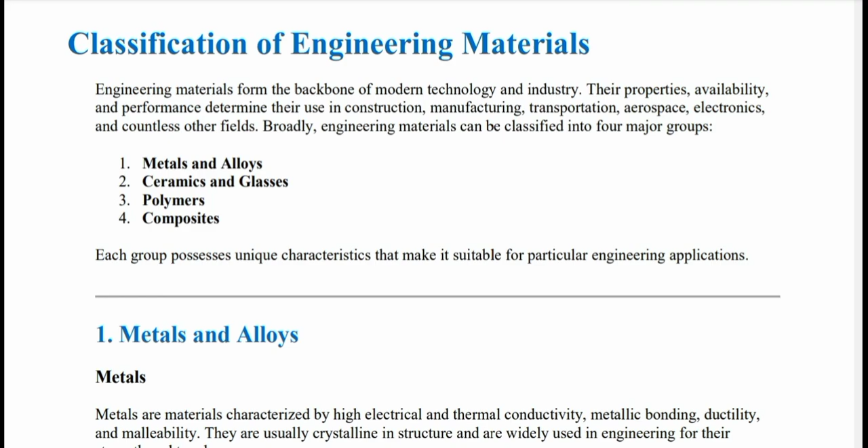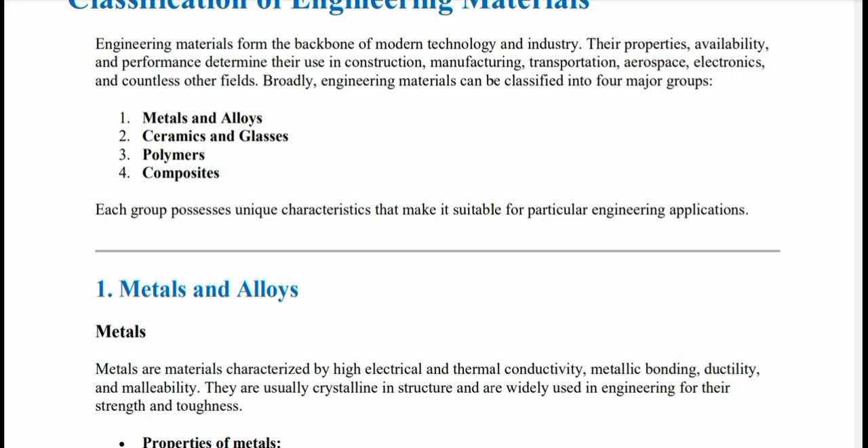Broadly, engineering materials can be classified into four major groups. First is metals and alloys. Second is ceramics and glasses. Third is polymers. And fourth is composites. Each group possesses unique characteristics that make it suitable for particular engineering applications.

So first is metals and alloys. Metals are materials characterized by high electrical and thermal conductivity, metallic bonding, ductility, and malleability. They are usually crystalline in structure and widely used in engineering for their strength and toughness.

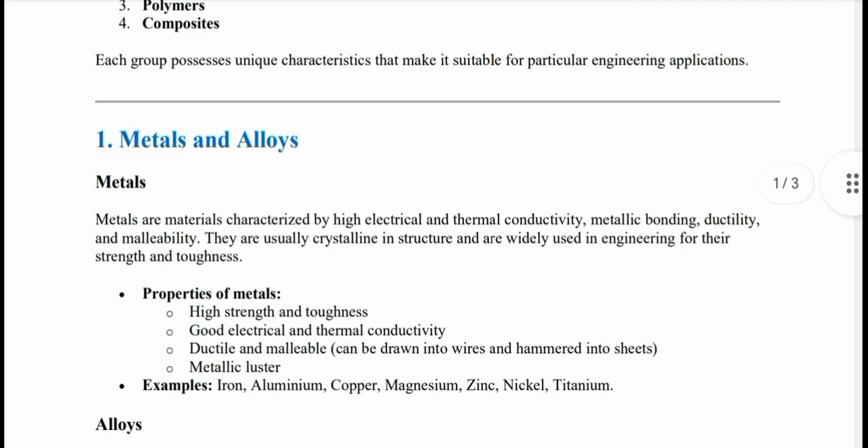Properties of metals: high strength and toughness, good electrical and thermal conductivity, ductile and malleable, that is, can be drawn into wires and hammered into sheets. Then metallic luster. Some examples are iron, aluminium, copper, magnesium, zinc, nickel, and titanium.

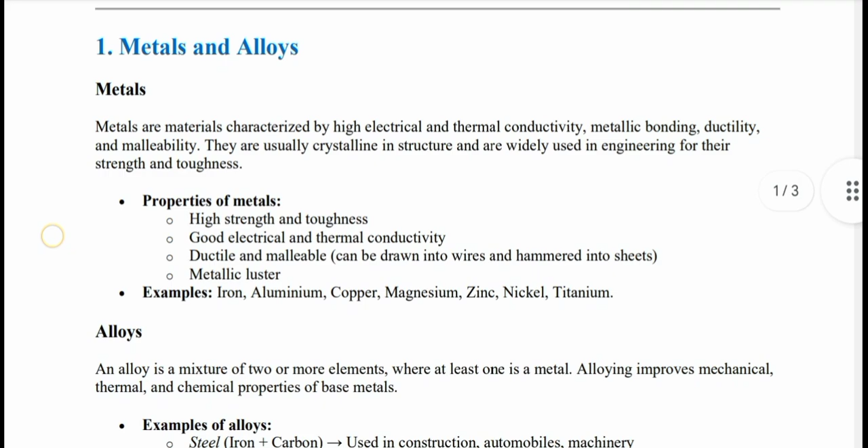Then alloy. Alloy is a mixture of two or more elements where at least one is a metal. Alloying improves mechanical, thermal, and chemical properties of metals. Some examples: steel is the alloy of iron and carbon used in construction, automobiles, and machinery.

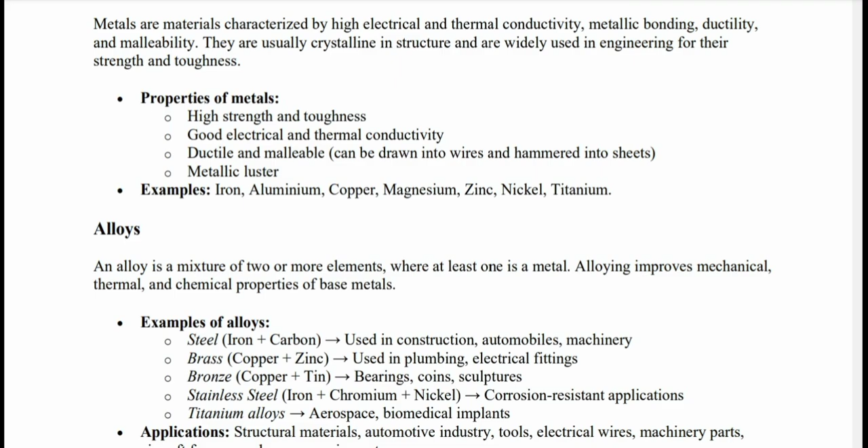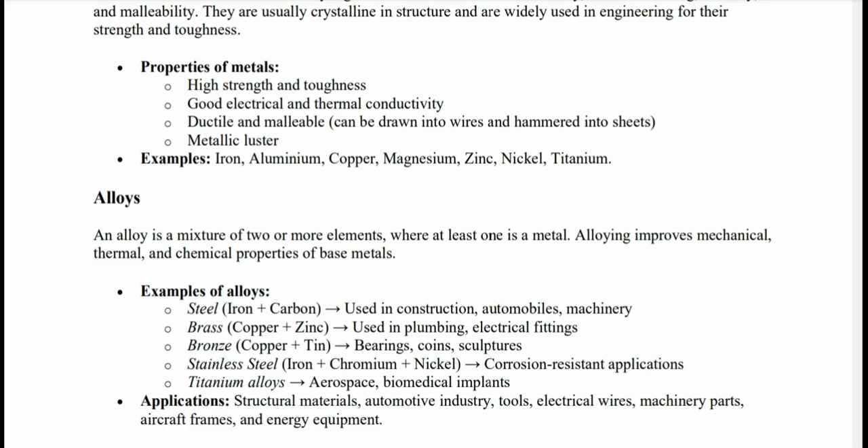Then copper and zinc form brass, used in plumbing and electrical fittings. Copper and tin form bronze, used in bearings, coins, sculptures. Iron, chromium and nickel form stainless steels, used in corrosion resistant applications. Then titanium alloys, for aerospace and biomedical implants.

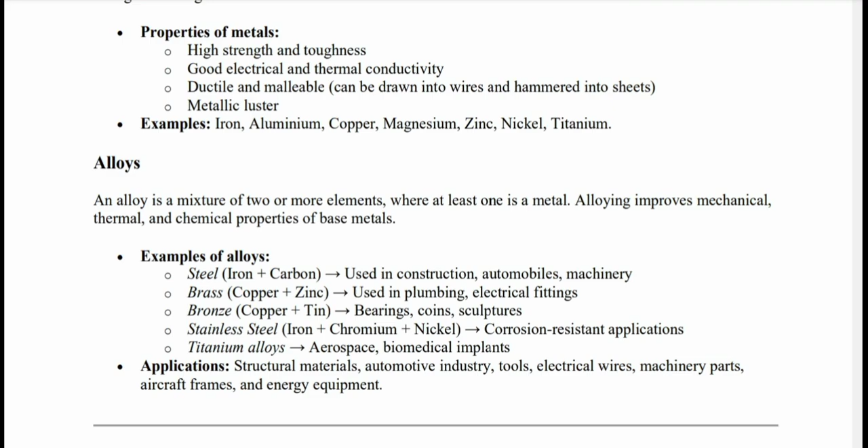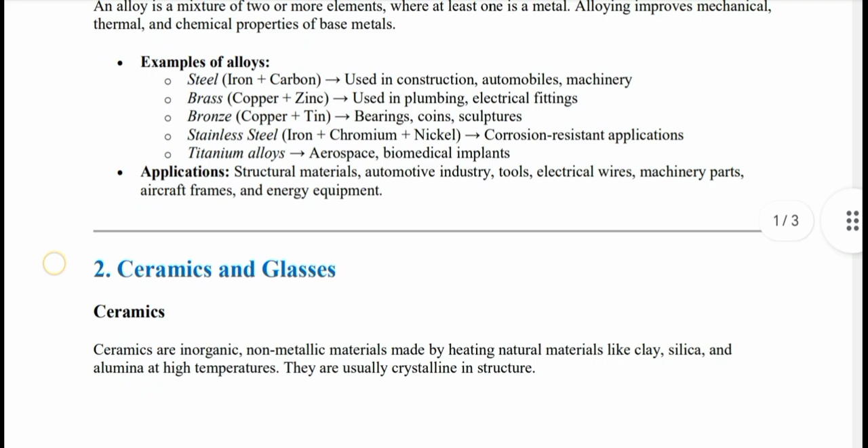Applications: structural materials, automotive industry, tools, electrical wires, machinery parts, aircraft frames, and energy equipment. Now, second type is ceramics and glasses. Ceramics are inorganic, non-metallic materials made by heating natural materials like clay, silica, and alumina at high temperatures. They are usually crystalline in structure.

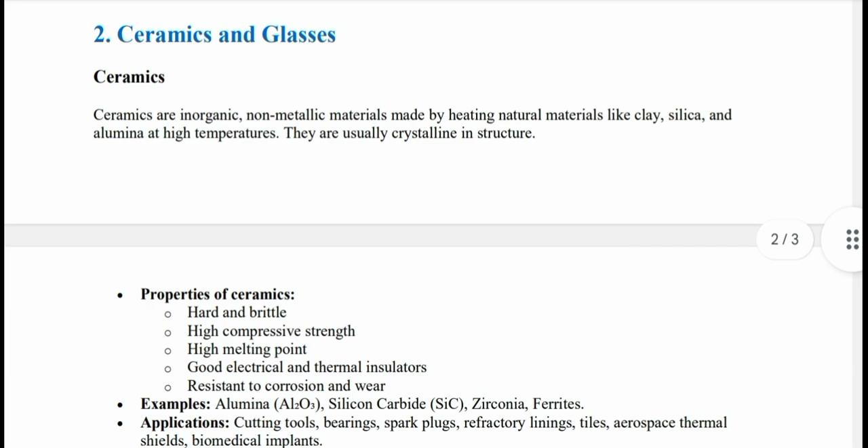Properties of ceramics: hard and brittle, high compressive strength, high melting point, good electrical and thermal insulators, resistant to corrosion and wear. Some examples are alumina, silicon carbide, zirconia, and ferrites. Applications: cutting tools, bearings, spark plugs, refractory linings, tiles, aerospace thermal shields, biomedical implants.

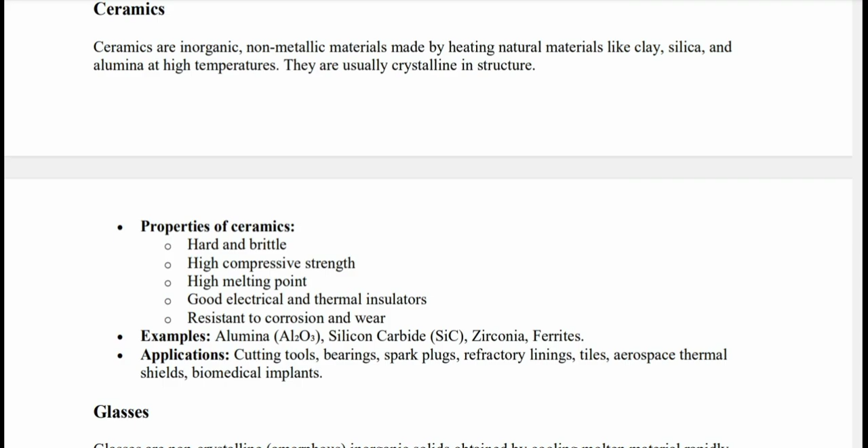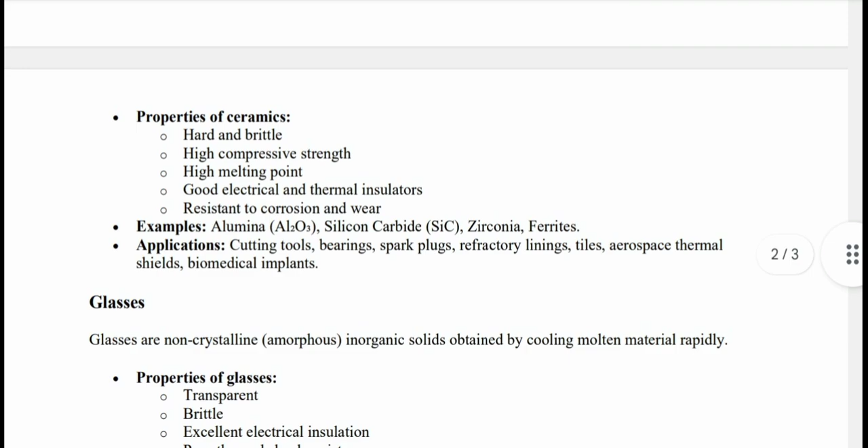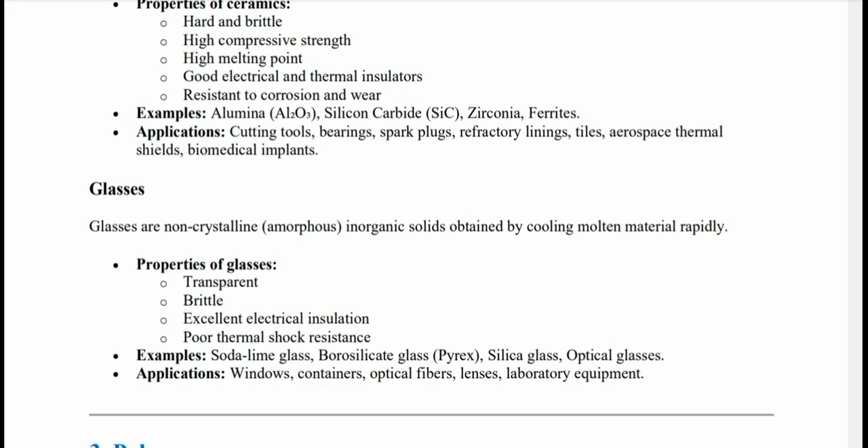Then glasses. Glasses are non-crystalline, that is amorphous, inorganic solids obtained by cooling molten materials rapidly. Properties of glasses: transparent, brittle, excellent electrical insulation, poor thermal shock resistance. Some examples are soda lime glass, borosilicate glass, silica glass, optical glasses. Applications: windows, containers, optical fibers, lenses, laboratory equipment.

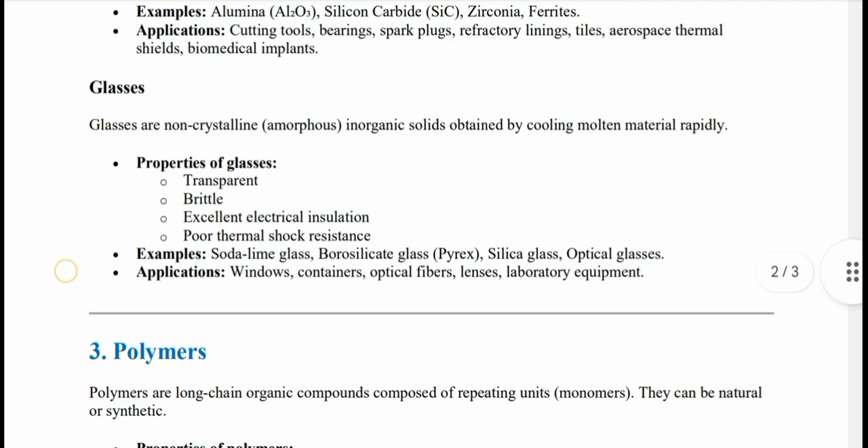Third type is polymers. Polymers are long chain organic compounds composed of repeating units, that is monomers. They can be natural or synthetic. Properties of polymers: lightweight and low density, corrosion resistance, electrically insulating, can be flexible or rigid, low strength compared to

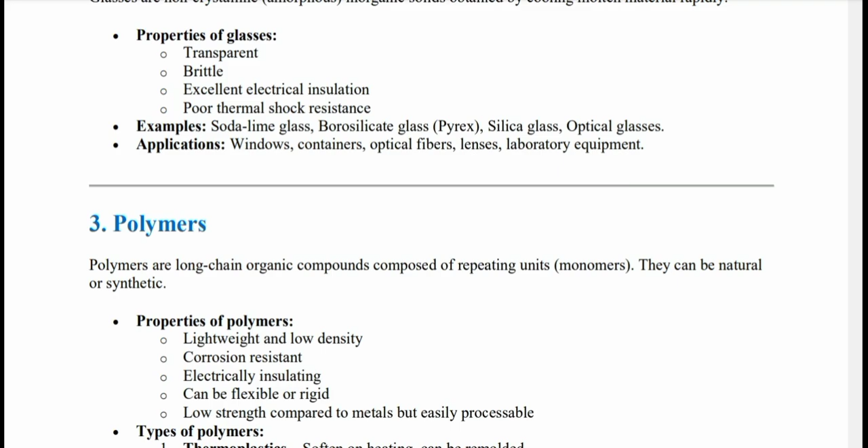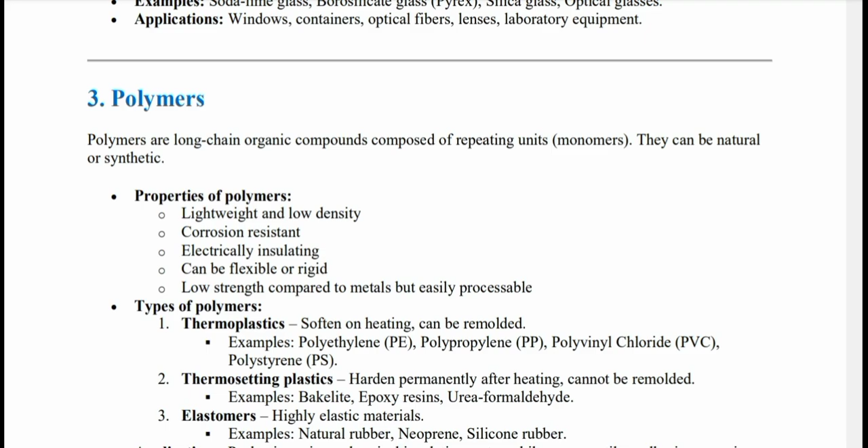metals but easily processable. Types of polymers: thermoplastic polymers soften on heating and can be remolded. Examples: polyethylene, polypropylene, polyvinyl chloride, polystyrene. The second is thermosetting plastics, which harden permanently after heating and cannot be remolded. Examples: bakelite, epoxy resins, urea-formaldehyde.

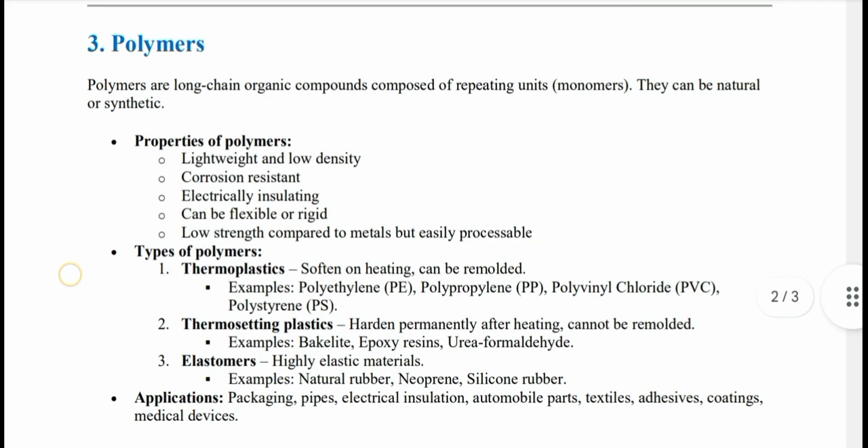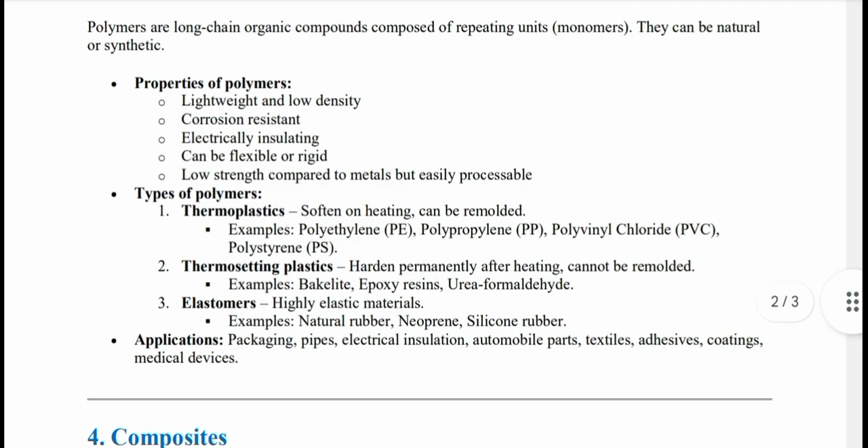The third type of polymers is elastomers, highly elastic materials. Examples: natural rubber, neoprene, silicone rubber. Applications: packaging, pipes, electrical insulation, automobile parts, textiles, adhesives, coatings, medical devices.

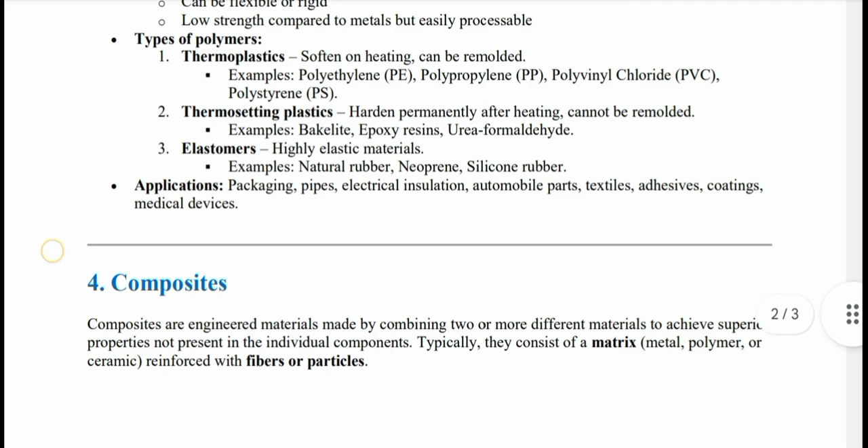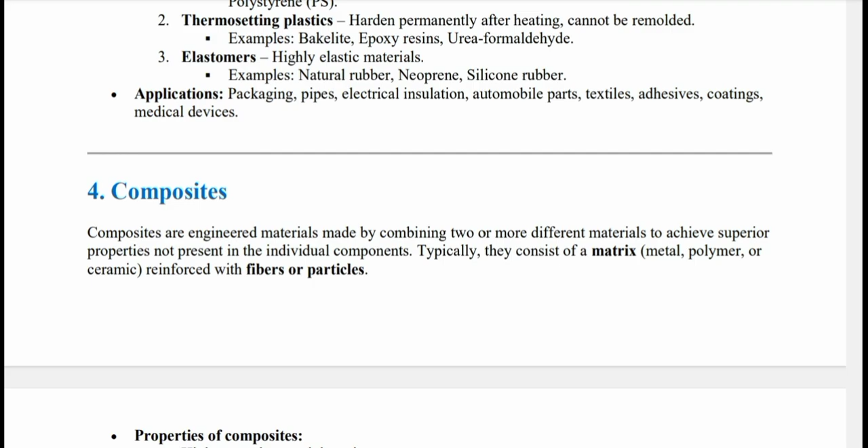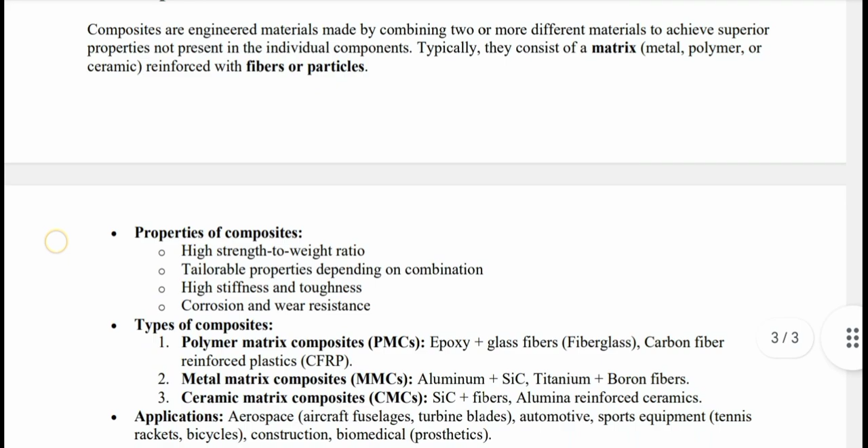Fourth type is composites. Composites are engineering materials made by combining two or more different materials to achieve superior properties not present in the individual components. Typically, they consist of a matrix, metal, polymer, or ceramic, reinforced with fibers or particles. Properties of composites: high strength to weight ratio, tailorable properties depending on combination, high stiffness and toughness, corrosion and wear resistance.

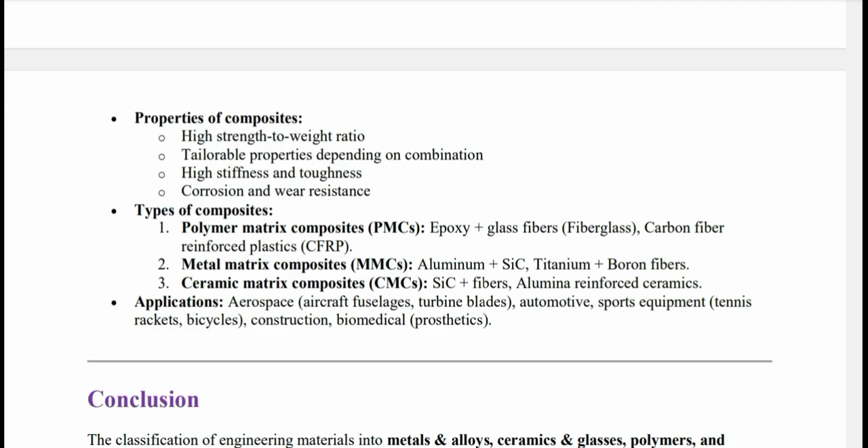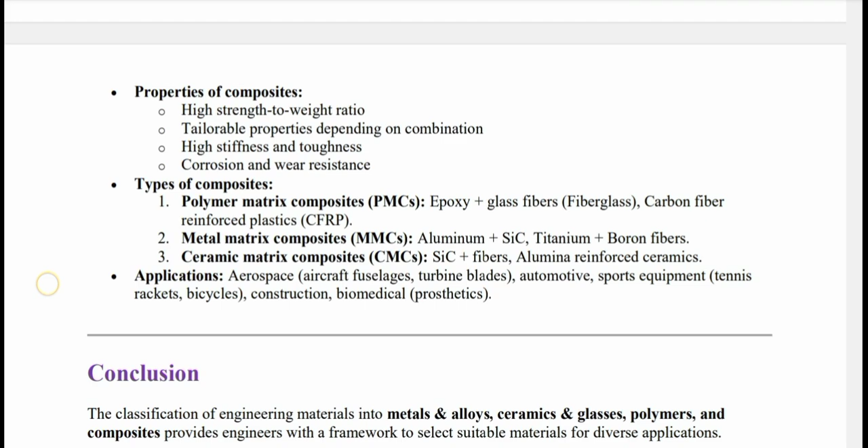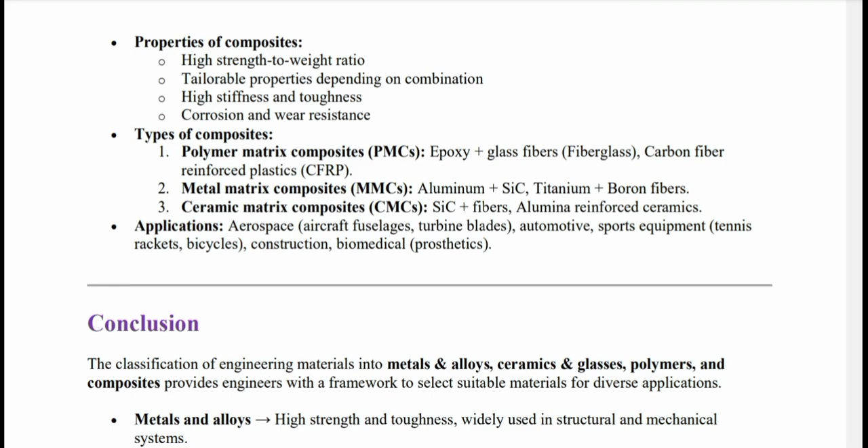Types of composites: polymer matrix composites, epoxy plus glass fibers, fiberglass, carbon fiber reinforced plastics. Metal matrix composites, aluminium plus silicon carbide and titanium plus boron fibers. Ceramic matrix composites, silicon carbide plus fibers and alumina reinforced ceramics. Applications: aerospace, aircraft fuselages, turbine blades, automotive, sport equipment like tennis rackets, bicycles, construction, biomedical prosthetics.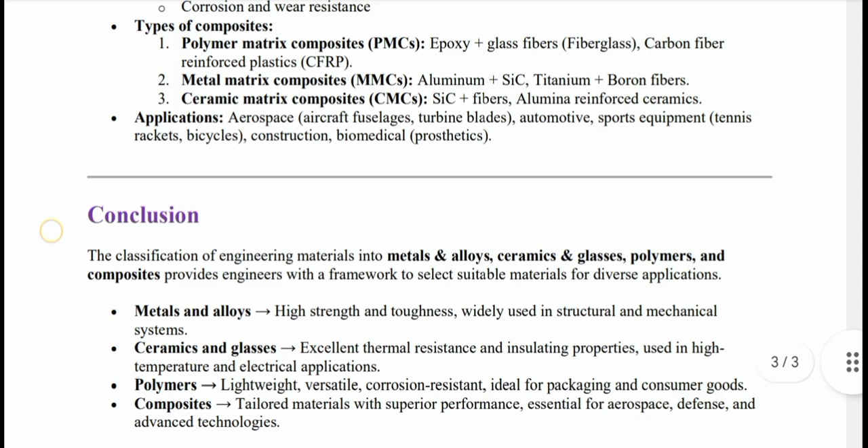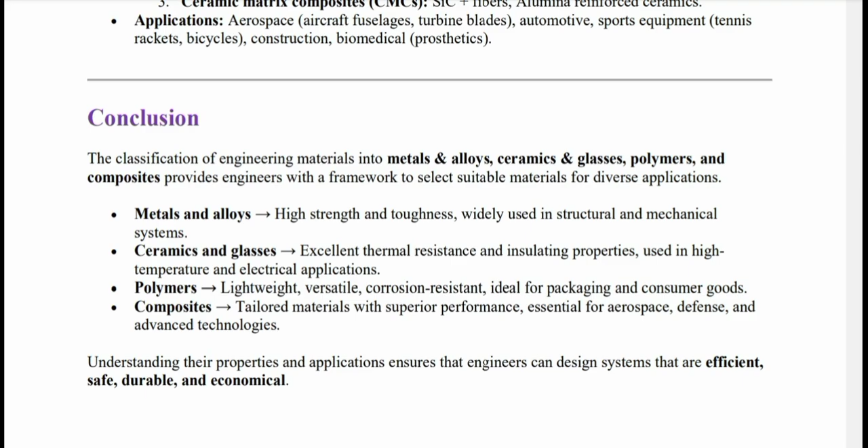Conclusion: the classification of engineering materials into metals and alloys, ceramics and glasses, polymers and composites provides engineers with a framework to select suitable materials for diverse applications. Metals and alloys: high strength and toughness, widely used in structural and mechanical systems. Ceramics and glasses: excellent thermal resistance and insulating properties, used in high temperature and electrical applications.

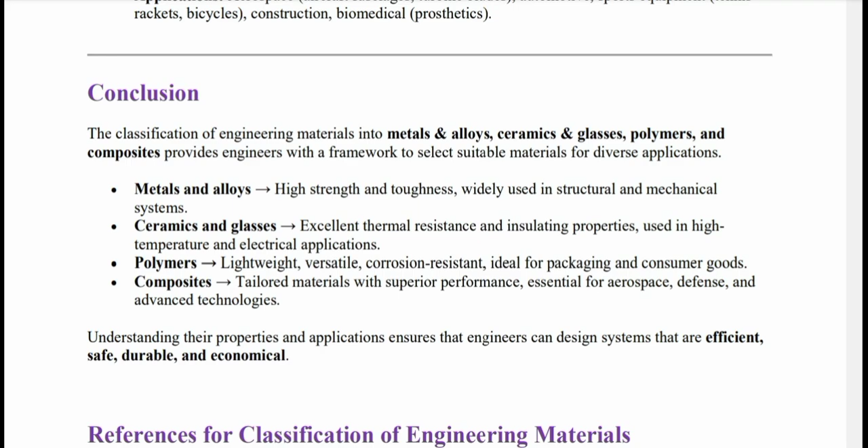Polymers: lightweight, versatile, corrosion resistant, ideal for packaging and consumer goods. Composites: tailored materials with superior performance, essential for aerospace, defense and advanced technologies. Understanding their properties and applications ensures that engineers can design systems that are efficient, safe, durable and economical.

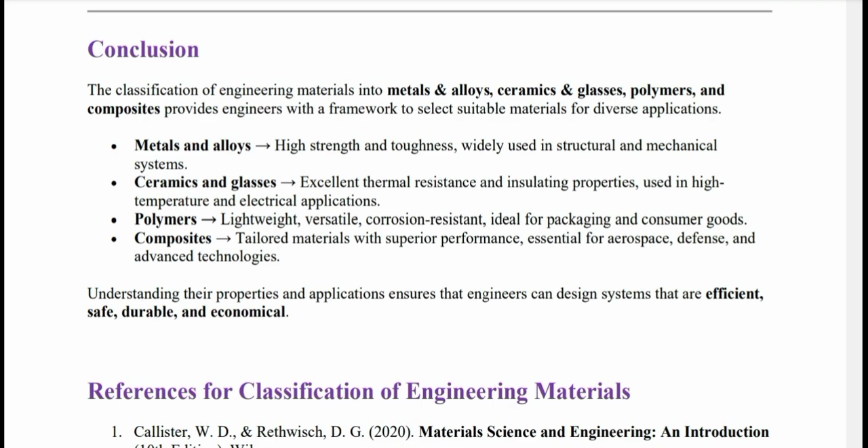So why do we study the types or the classification of materials? Because their properties and applications help engineers design systems, equipment or jobs that can be efficient, safe, durable and economical. That's why the classification of materials is very useful. Now here you can see the references for classification of engineering materials.